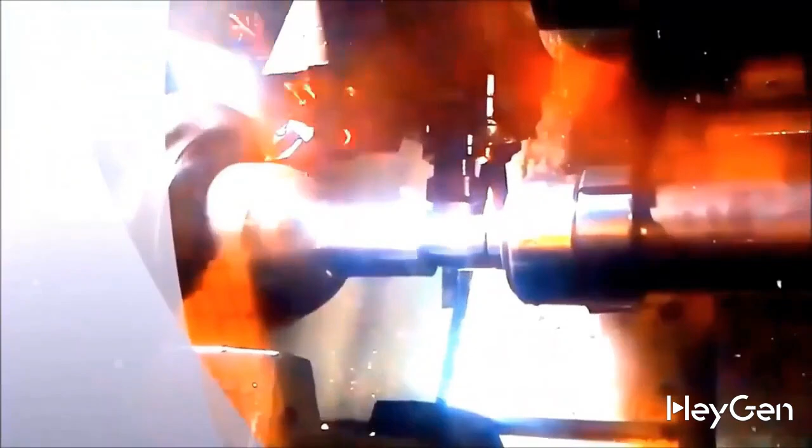As for Sinutrain, let's do a tutorial. As for the piece you see on the right, this time we are also staying within the realm of pure turning.

I know some of you have asked me to also consider the topic of milling. We will do it, certainly. I've already made a video, if you haven't seen it I recommend checking it out, titled Let's Play with Sinutrain, where there's a bit of milling, though I wouldn't really define it as a real tutorial.

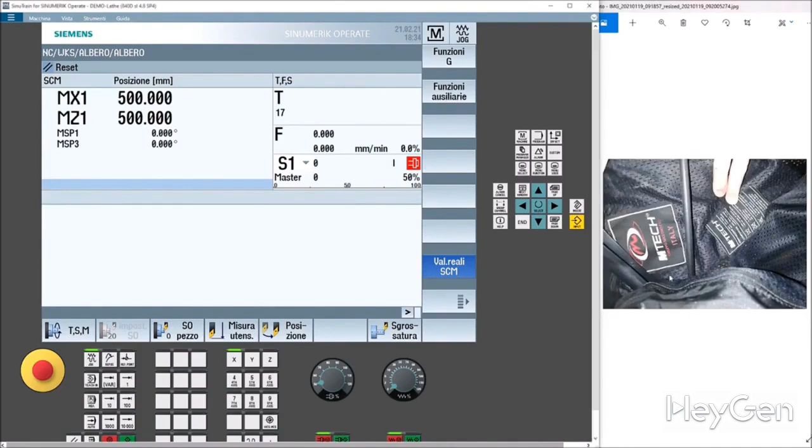What's going on here? Here we are, a real tutorial, but it's just a little game. Today, however, we're talking about turning. Let's start by walking, and then we'll run.

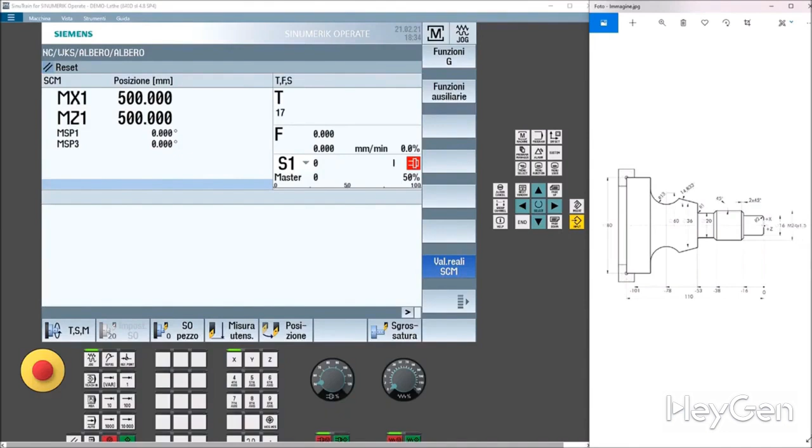So let's start, as always, with creating the program. In Program Manager, still in the subfolder Parts, New. Let's call it Hub - I also have little imagination when it comes to names. We give it the go-ahead.

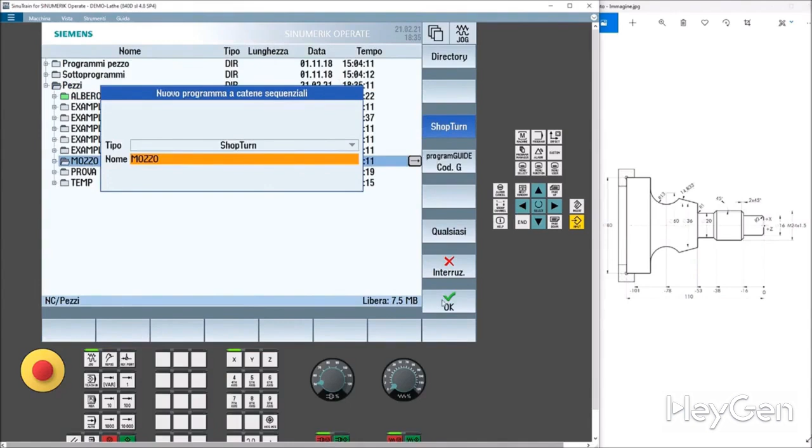As you already know, it creates the simple subfolder. Then, as always, it asks if you want to work in G-code or ShopTurn. We give it the go-ahead and create our actual program.

The first request we have is simply to create the blank. So we work in G54. Our zero actually corresponds to this area, that is the face of the piece that is farthest from the self-centering chuck.

You can see that we have the table in another format, meanwhile preloaded with the data of the last piece we entered. So it's still a blank with a diameter of 80. We have a stock allowance in Z of 2 mm.

Yes, it's the length of the piece. In this case, 110. It asks for the negative, and ZB is indicated as 101, so minus 101, the overhang from the clamps of the piece.

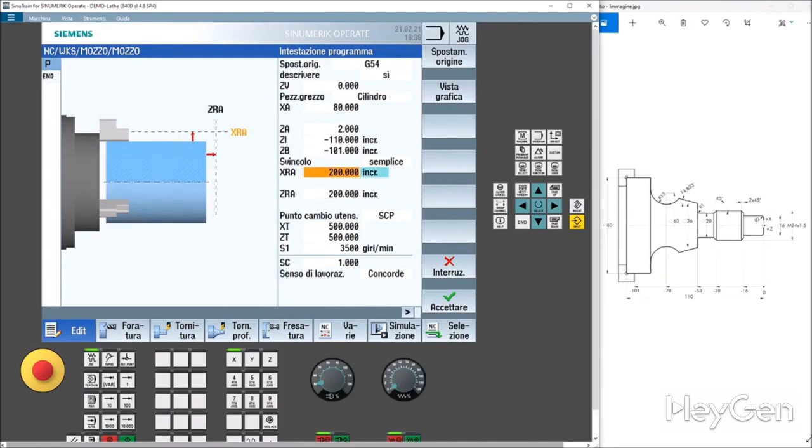Everything else is typically left as we find it, because in most cases normally nothing changes. We don't have any particular issues with the detachment from the piece, so that's fine. We accept it, and we've entered our simple code.

All right, let's start with the first machining operation - a facing of the piece, which we do no more and no less than as we did last time. So with our soft key straight circle, so straight.

Before moving, we have to call the tool. We select the tool and go get the tool with which we will then rough out the piece. Since this piece doesn't require any particular roughness on top, we'll chamfer it in one go, since we only have 2 mm of excess material.

We chamfer it at meters per minute - I would say 180 for a turning operation. We accept it, and here we write straight.

And we go to X-1.6, since our tool has a radius of 0.8, to avoid leaving a turning bevel, with an F of 0.3. It can happen that with some materials, going to Z0 with a very high feed rate at X0 - in this case minus 1.6, that is in the center of the piece - with a very high feed rate can cause tool breakage.

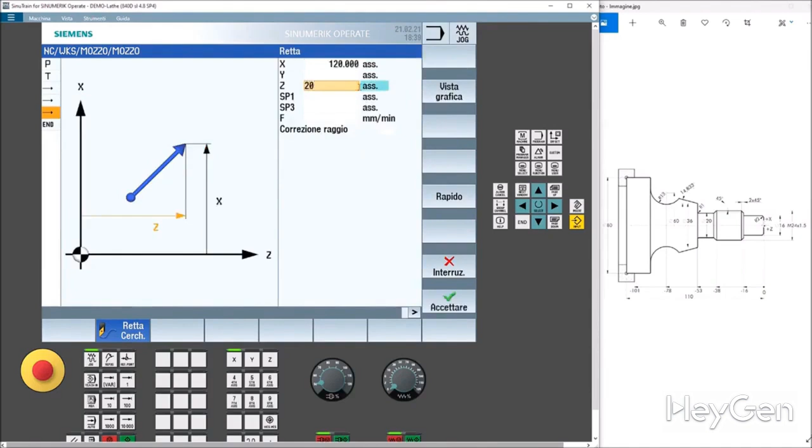All right, let's move away. X120 - see? Z20. Quick, accept.

Great, we just did a very simple chamfer. Ah, okay, no - I was building it wrong. I said there's something wrong right away, because I saw the spindle on one side and the piece on the other.

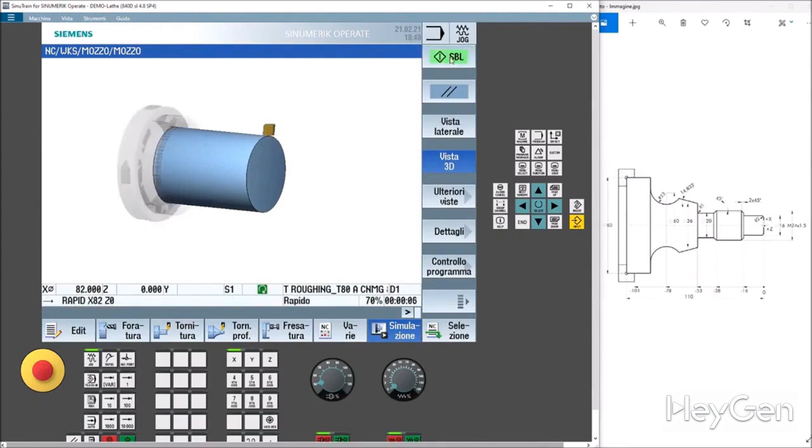Still in program control, I can set it to single block, go back, and press start, start, start, you see. Every time I hit start, we get the reading of a block. Perfect. Program control, let's remove the single block and go back to our little program. Great. What we need to do now is create our profile.

So, turning, profile. Here we are, new profile. Let's enter the name. Let's call it profile again, because we have so much imagination. And we say accept. All right, where do we start from? This time, we start from X0, Z0, that is, from the center of the piece. I usually chamfer and then rest here, but let's do something very educational. We accept, and let's start.

Working. We need to move upwards. So, arrow up, X. You see it's a 16 and a chamfer of 2, so X16. Modify the chamfer to a radius of 2, accept. Press soft key left right, Z-16, no chamfer or radius, accept, and we've moved into this area.

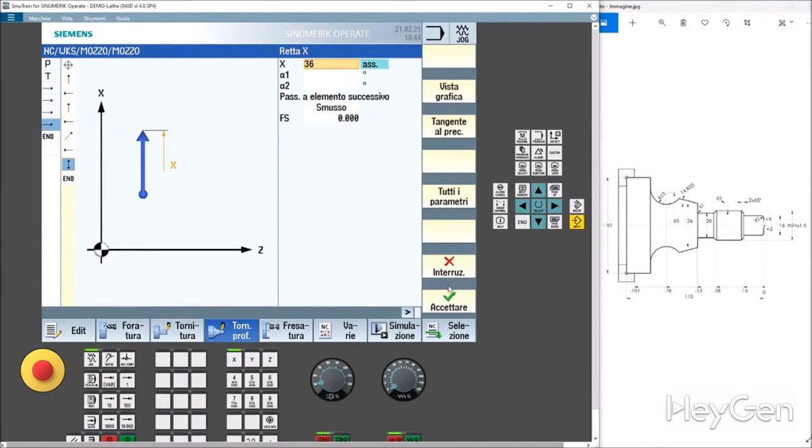We need to finish with a radius of 1 to the left up to Z minus 53. You see that we are at absolute 53. We have a radius of 1, so the chamfer becomes a radius and becomes 1, accept, and we have arrived. Here, perfect, X36. So we go up. Here we go, X36, and we accept. All right, now let's work with

alpha 1. So we give it the inclination, and you see that we're missing some data. What data are we missing? We're missing the diameter and the Z. The only data we have is 14.833. So, in this case, we give it alpha 1, and we give it as the opening from angle 0. This line is angle 0. We open up in this direction. You see? It's 180 minus 14.833.

So, 165. I put the dot. If it's not the dot, it will be the comma. 167. Okay, we give it, because I don't like having a gap or edge here. I set a radius of 0.4, and let's see if it generates an error. 0.4. Accepting it doesn't generate an error, but you see it creates a line, and it's indeterminate.

Okay, now we need to go and perform a circular interpolation for which we have a good amount of data. So, circular interpolation, rotation direction to the right or to the left. It's definitely not this because we're working in this direction. So, this is it. Perfect. Radius. We have it. Here it is, radius 13. Then X. Of this X, we have nothing. And of this Z, we have nothing, which are the final Z and X.

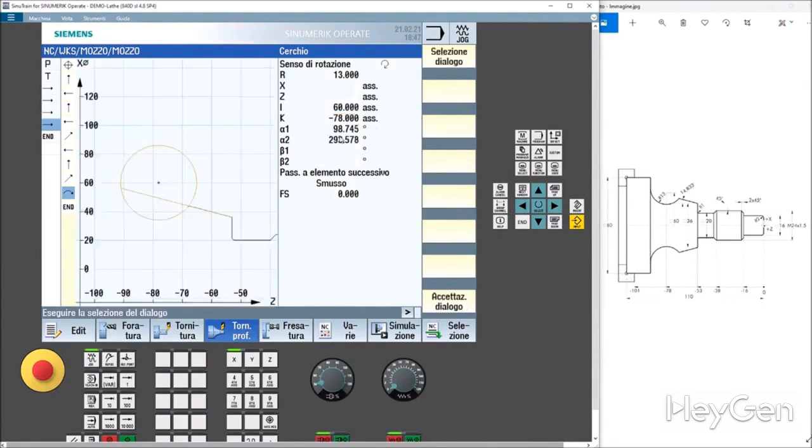Okay. Look at this beautiful construction it made. It built a structure. But right now, if I don't tell it what to do next, it won't do it. As a result, now we need to tell the machine how it should go to work. It understands that something isn't right, so it accepts the dialogue.

Sorry, excuse me, I just need to redo it. Please let me quickly put all of the necessary information back in. So, R13, I60, K78, OK.

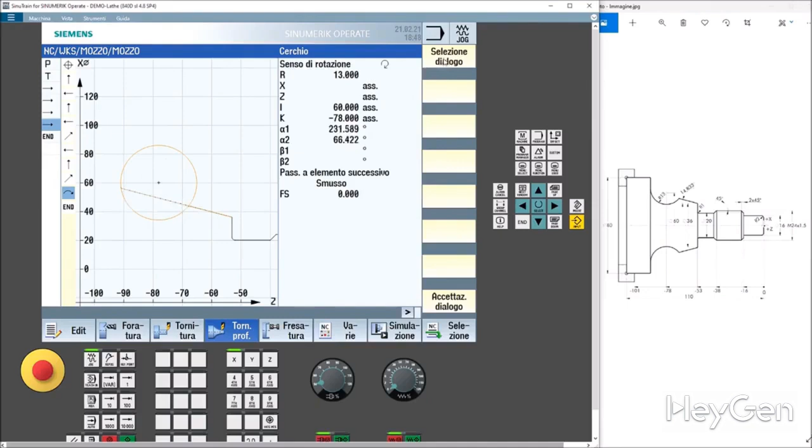Now let's go up and go to X80. Obviously the machine can't understand what to do like this, because it doesn't have an indication. I mean, it knows it has to go to 80, but it doesn't have a real starting point. Do you see these soft keys? Perfect. Tangent to the previous one.

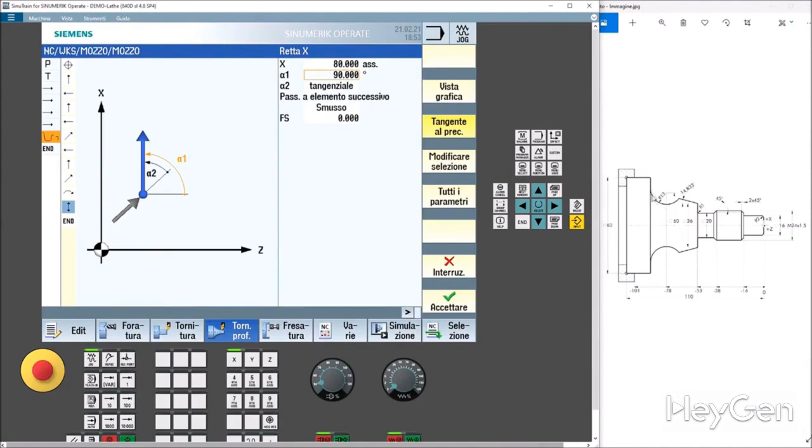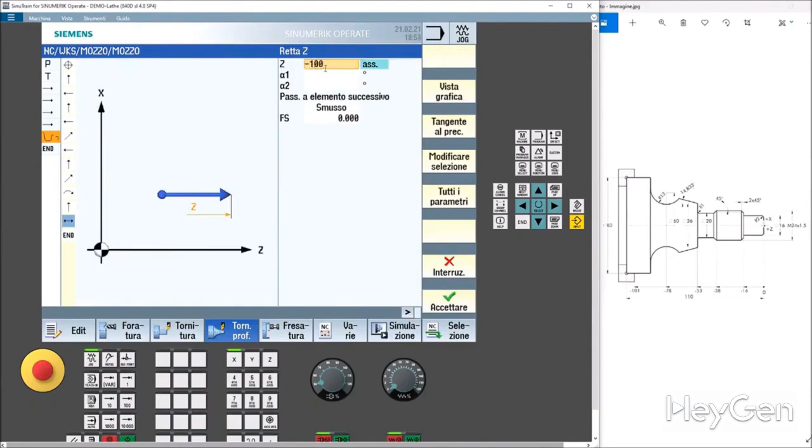Tangent to the previous one, the previous movement was this. So a circular interpolation. I'm moving to X80, starting tangentially to the circle created. We accept, tap. You see it cuts it for me. Perfect. At this point, I finish my profile. Moving to Z minus 100. We accept. And let's go modify this ugly thing.

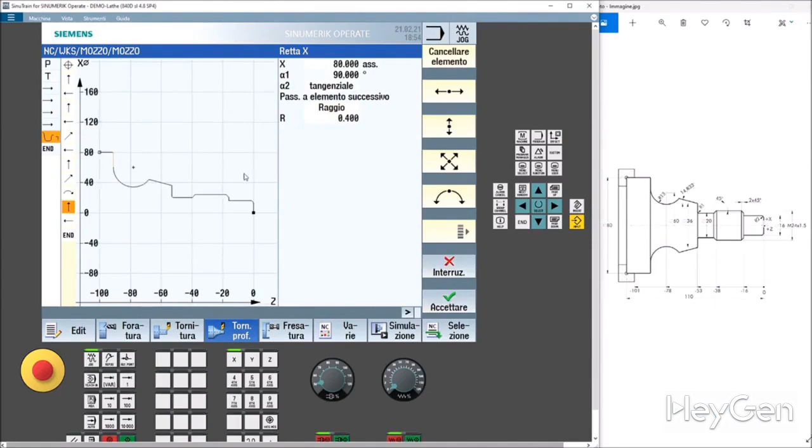Here. As you can see, it doesn't have a chamfer. I would like to give it a nice radius, just so as not to give the customer a product that cuts their hands. And we did it perfectly, with great precision and attention to detail. Let's accept and start roughing, the next phase of our project.

First of all, of course, we need to select the tool, so here it is, select inventory, interruption, select tools, roughing tool. Okay, it was already within the parameters from the last time we used this tool. And we say, okay, you can work well, but with a CNMG at 80 degrees, with an attack angle of 80 degrees, I can't do undercuts. We accept and simulate. Let's see what happens.

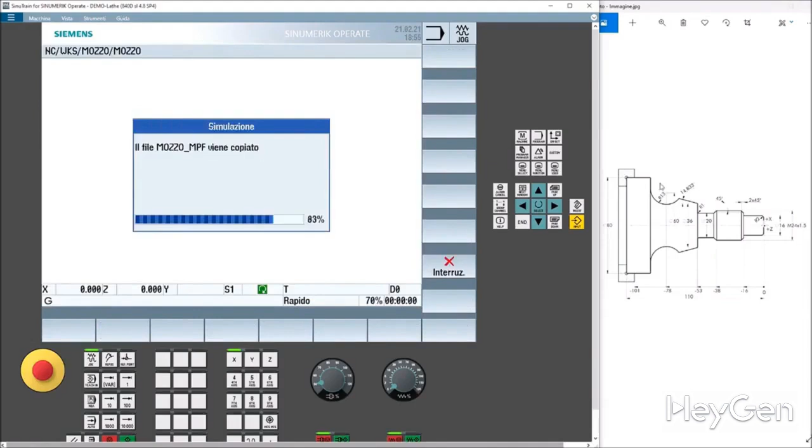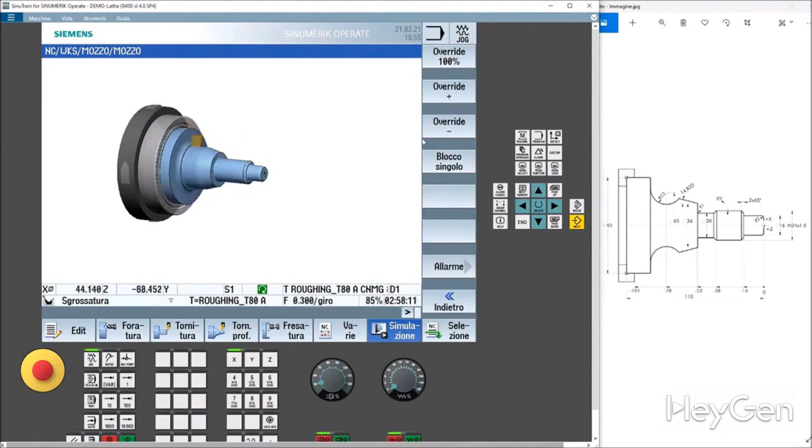I'm aware that I had already made a program like this. I haven't told you some things about the roughing cycle. Now, just in case, let's take a quick look at it together, just for those who missed the other video. Here, you can see that our part was made completely ignoring these two areas.

Let's go back to edit. Let's go back to the roughing cycle with the right arrow and modify something. Is it okay to rough parallel to the profile? Yes, that's fine. Is it okay to do an external machining? Yes, that's fine. It's fine to do a roughing, because I could use the same tool for both roughing and finishing. The only thing I overdid, which I haven't modified, is the material removal.

For each pass, at least 5 millimeters, since we have a nice diameter of 80, and also because it has a long undercut. We accept and resimulate. This will just make things a little faster, but it won't change anything compared to before. So, our roughing, you can see that it makes more generous material removals compared to before, which is a significant improvement in terms of efficiency and speed. Perfect.

At this point, I would choose between two options. We could either rough these areas seen as lines or make a modification. A modification in this sense. Let's go. Select the tool. Let's enter the warehouse. So, interruption, let's see if it's from here. Interruption, so select, tools, selection, warehouse, tool list. Here it is. So, let's redo it. Let's take it slow. I got myself all mixed up.

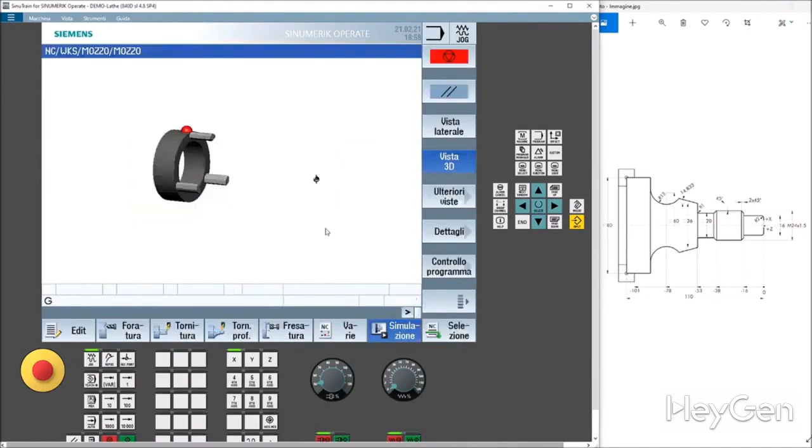You see, perfect, transfer to the program, and in the undercuts F and R are also the feed per revolution. When I enter an undercut, it's assumed that I should go a bit slower. Let's accept and simulate. Here, maybe in reality, it would have been better to lower the roughing depth. You see it's starting to go down, of course, within the limits of the tool.

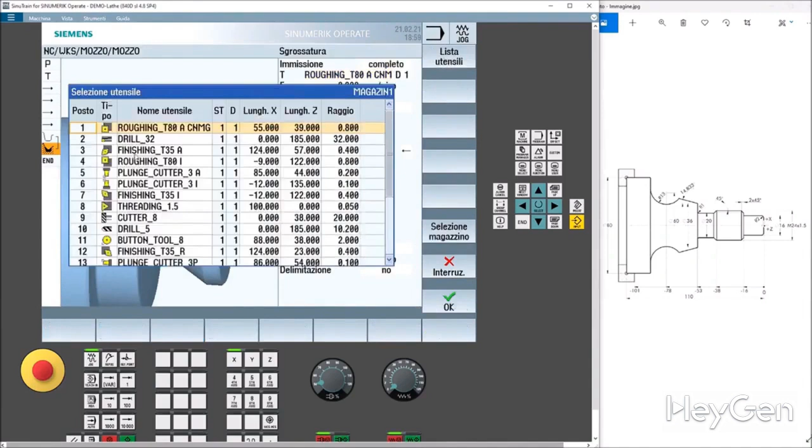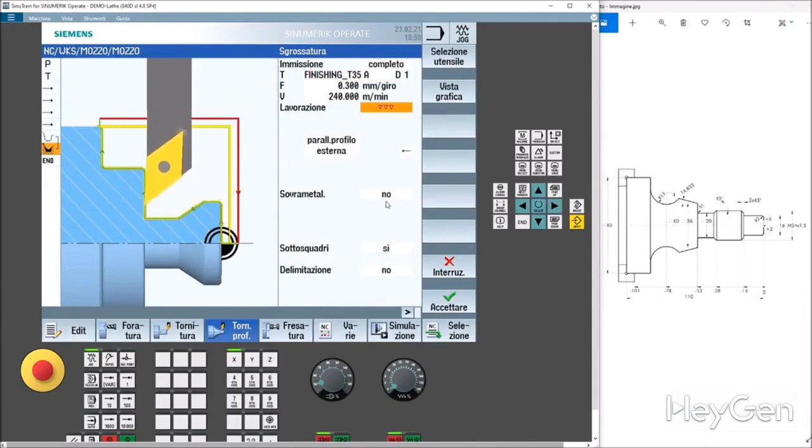That's great, because at least we've cleared that area now. We basically go into edit in turning, profile, roughing, and we will essentially tell it. Now, however, actually select 1 for me and literally go do the finishing. Undercuts? Yes. Excess material? No. Parameters are good at 0.3.

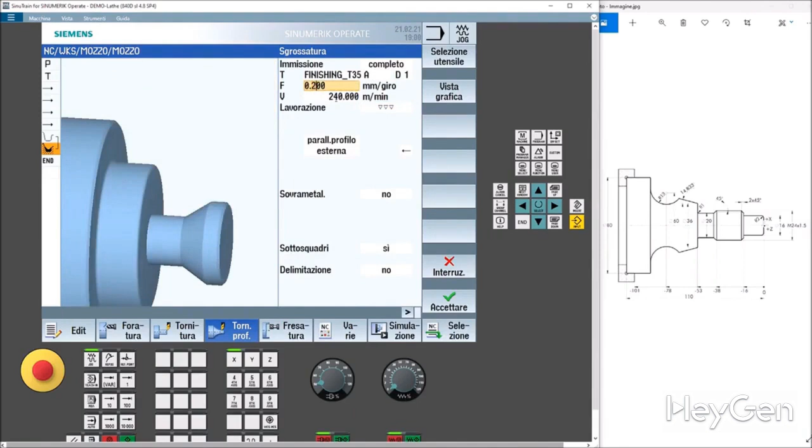Per revolution, let's set it to 0.2, because it's a bit lighter as a tool, and then, anyway, we will establish this based on the surface finish required by the design. While learning, we have the luck of not having anyone watching us. So we say accept and simulate.

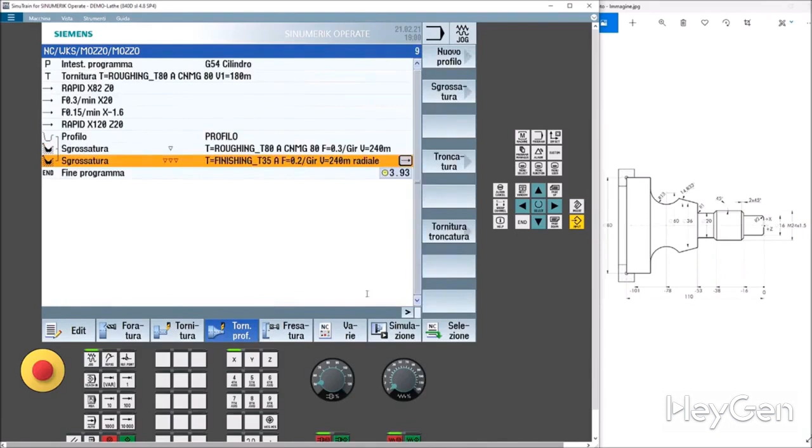So now, after the initial roughing phase, the tool will be carefully changed in this process. And the undercuts will be made, which will conform to the design. In this case, it's more appropriate to see it this way. Now it gets to the step. Finishing, and you see that it can make the radius because we can do it. At the limit, we could have easily used a round insert.

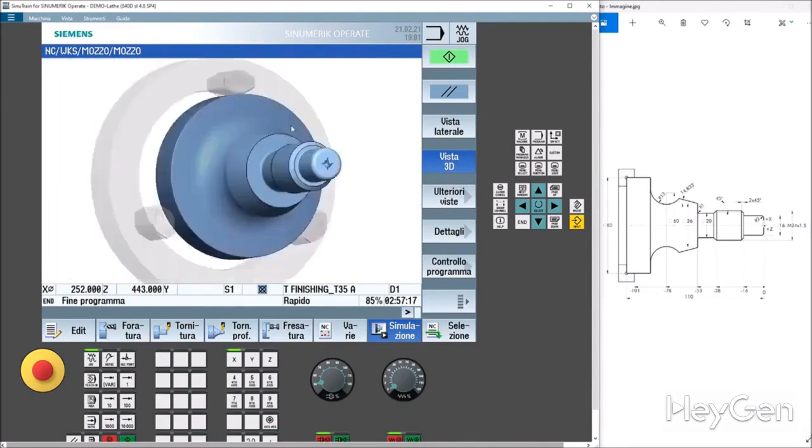At the limit, we could have split the shape in two so we could program from here to here or from here to here. There isn't a right path. What's important is that the path takes us where we need to go. And as you can see, our product, it's almost done. Let's go back to edit and head to the end of our program, turning, thread cutting.

We have an M24X1.5. So it has already selected the tool that we need. You see, threading 1.5, table. Let's say an isometric. Let's go and see if the M24 isometric is 1.5. I don't think so. You see it says 3 mm per revolution. So I can't use the table. Then I'll go without it. A pitch of 1.5 per revolution works perfectly for me.

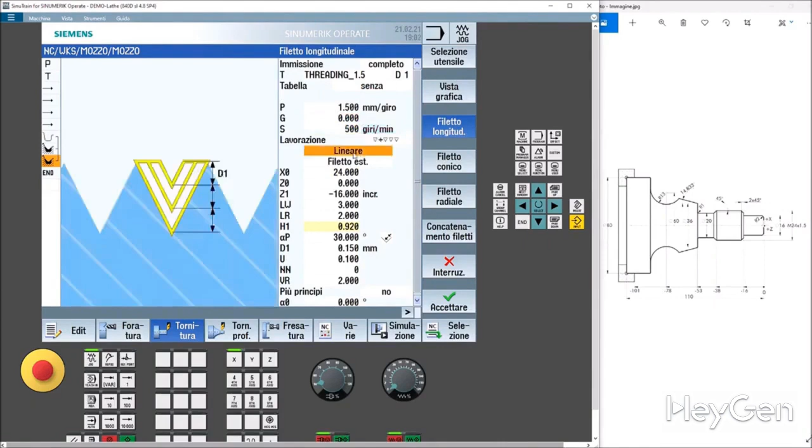The pitch doesn't change. Yes. It's the revolutions per minute. So our machining is linear machining. That's great. Otherwise, we can set up a machining process that decreases D1 as it goes down. That will depend on the material we're going to work with. It's an external thread.

But extension, here we go, incremental. That's fine. In this case, incremental works well. Otherwise, we could set it to absolute and not have to do calculations and just put in -40. LW. Safety distances, yes, there's also a nice chamfer. So starting at Z3 is more than fine.

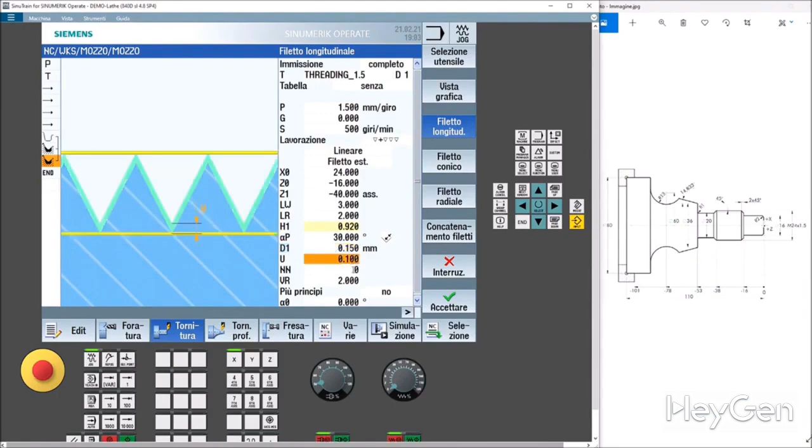LR. Theoretically, in this case, we don't care at all, because we exit and leave the 2 mm. H1. If it has already calculated it, it doesn't really matter to us because it does it for us. The insert, D1, is the depth we remove with each pass. U is the oversize we leave for finishing. VR, the tool distance that we use to detach when we leave. We accept and simulate.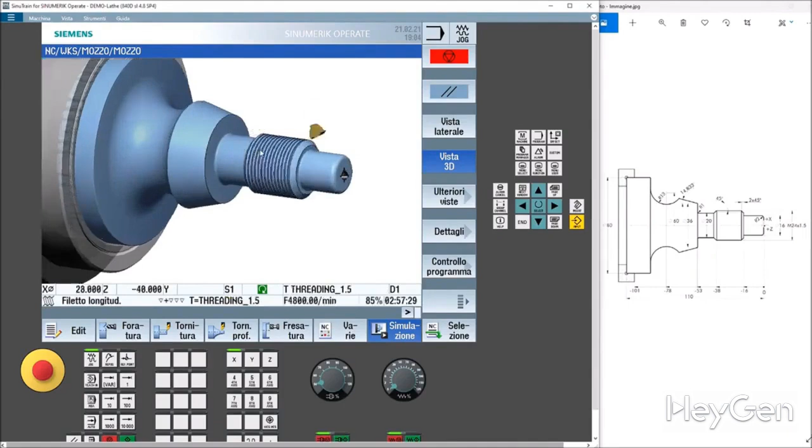And here we have our thread ready. This is also an example that can be found in some of the manuals that come with the machine. Then we might also do something different outside the guidelines of the manuals. But with these basic designs, you have a good range of possibilities that you might encounter in real life.